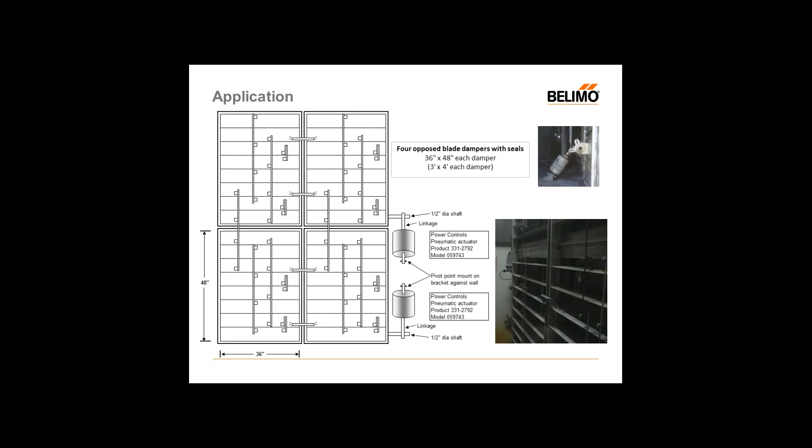Looking at the first application here, it's a typical one we've come across in the past, where we assisted a customer in replacing some older pneumatic type actuators. You can see the photos on the left and right, showing a typical assembly we came across on an air handler, and the information provided to us in terms of the physical aspects of the damper. But of course, there are other conditions that apply when you properly size the damper actuator.

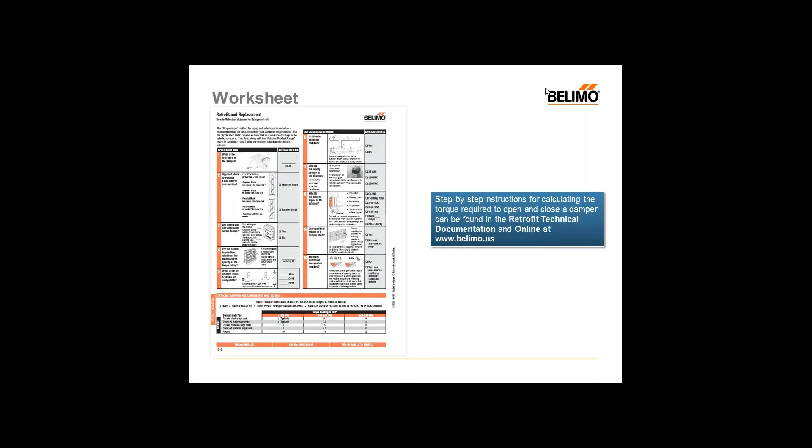The worksheet shown here has basically 10 simple steps that will help you properly size and select a damper actuator. These instructions can be found on our retrofit technical documentation and also online at our Belimo website. We always have technical support staff on hand to help with additional questions you may not be able to answer through this worksheet. But like I said, these cover the fundamentals in sizing.

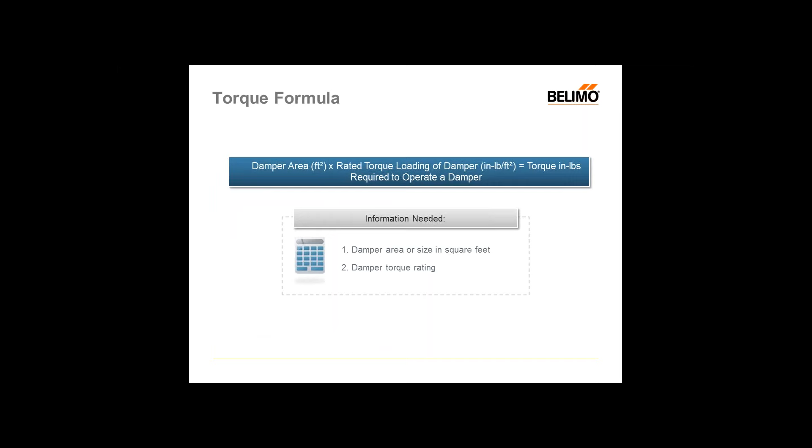Now let's start with the basics: the torque formula. We start with the damper area in square feet times the rated torque loading of that damper, which would be in inch-pounds per square foot. You multiply these two to get the torque in inch-pounds required to operate the damper. So the two pieces we need are damper area and the damper torque rating.

So first step, what's the total area? In that first example we showed, we had the height and the width. Either if it's already known, or you just take out your trusty tape measure and measure the size of the damper or dampers. You determine that square footage either from inches and converting it into feet, or straight from feet into square footage. In this case, a 3 by 4 foot damper equates to a 12 square foot area.

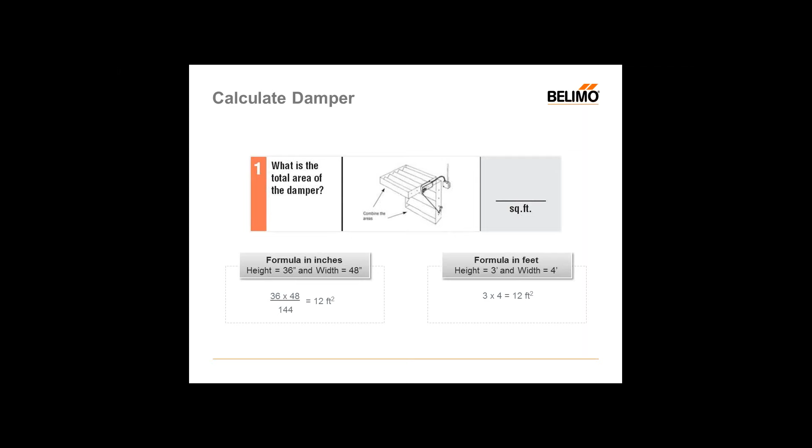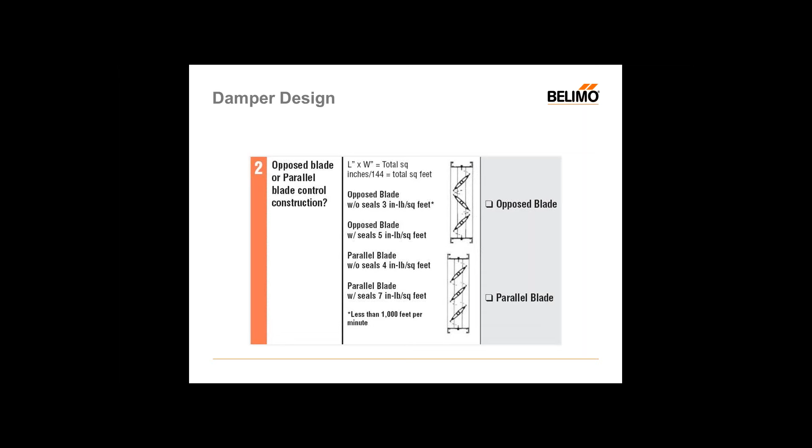Now, damper design - that's very important. So step 2, we have to consider what you're looking at: either an opposed blade or a parallel blade. This also plays a key factor in how much torque is needed to operate the damper. In our case, we have an opposed blade damper. Comparing the two, an opposed blade - just like the name calls out - has damper blades moving in opposite directions, which requires less torque compared to a parallel blade type damper, where the blades move in the same direction. These will typically use more torque.

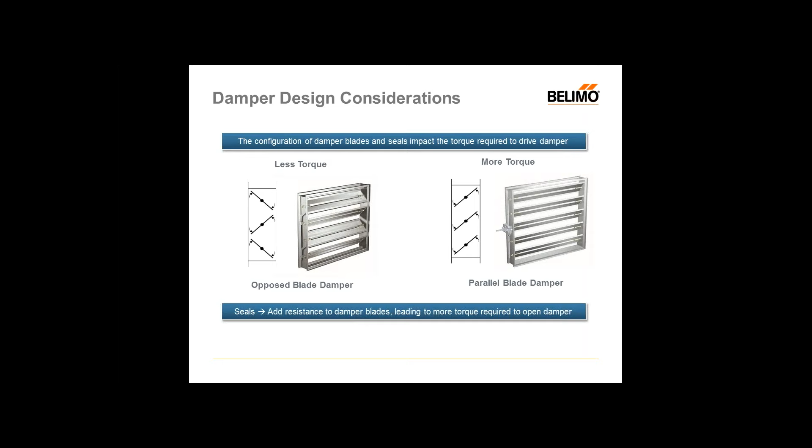Now, not only does the blade design play a factor, but also seals. You could have edge seals on the damper blades and around the damper frame against the blades, which cause extra friction, leading to more torque being required.

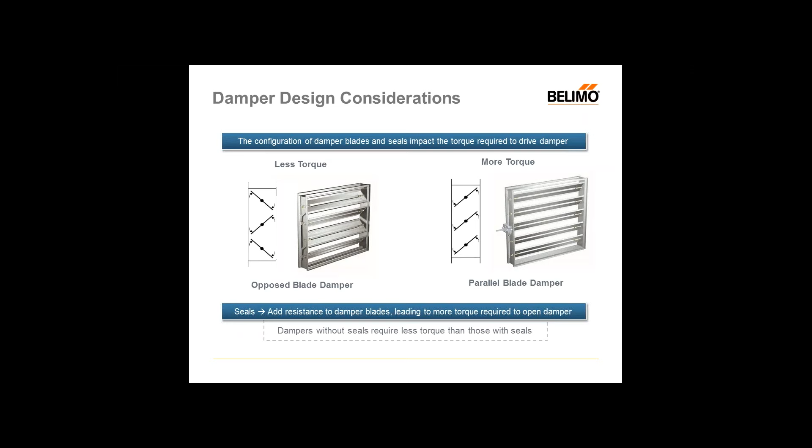Now, going from steps 1 to 2, we know what the damper design is, basically the blade type being used, in this case opposed blade, and we also know it has seals on them. So the torque loading with seals is 5 inch-pounds per square foot, versus an opposed blade without seals which is 3 inch-pounds per square foot. So there's that difference right there.

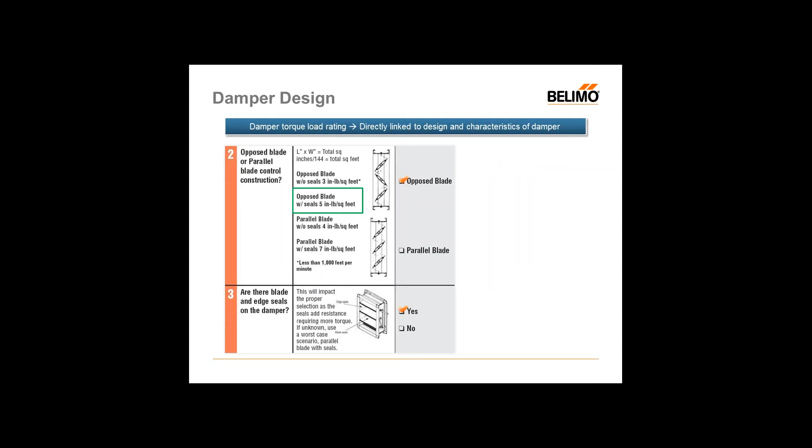Step number 4, the damper manufacturer typically would provide this information. It could either be on a cut sheet, a label stuck onto the damper, or on a blade or damper frame on the side, but sometimes this information may not be available. Maybe that label's scratched off, worn out, or the information just can't be read off the model of what that damper is.

So if it's not available, you can use the square footage information, and using that along with the type of blade and edge seals, in this case that we have, we use torque loading numbers that we've had for many years, worked on in association with a lot of our damper manufacturer customers, which become the typical numbers that you come across in the field.

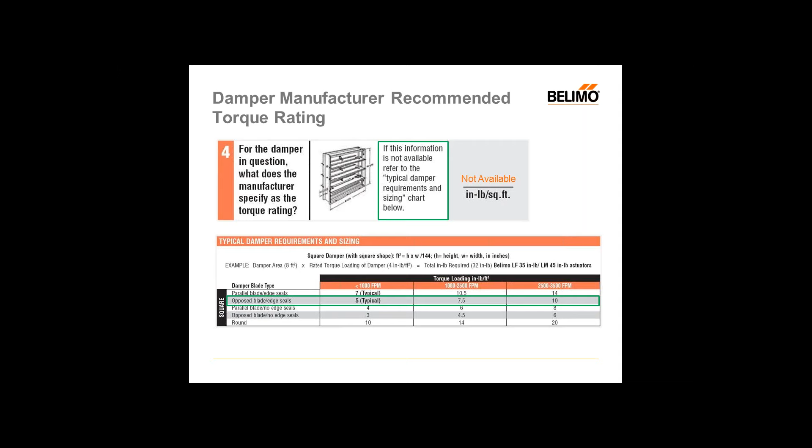In a typical HVAC application, you run into about less than 1,000 FPM in terms of air velocity. Torque loading will increase as well if that air velocity increases, so that's another factor to take into account. In this case, we'll start off with 5 inch-pounds per square foot at 1,000 FPM typical air velocity.

Now, if you do not have the FPMs, and if you do know the CFMs, you can easily calculate that by just dividing that by the square footage to get the FPMs.

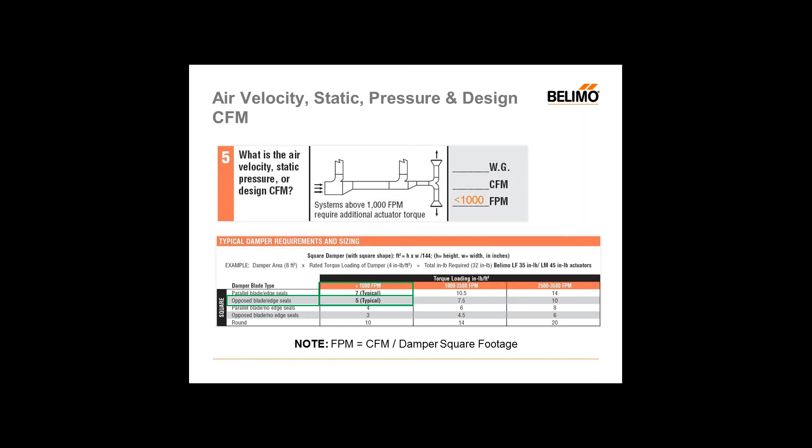Now, we do have these 3 different values for less than 1,000, 1,000 to 2,500, and 2,500 to 3,500 FPM. If the application does have a higher air velocity, we recommend that you work with the damper manufacturer to get more information on how that damper would be affected by higher velocity. That additional information will help us assist you in determining what the best solution could be.

Now, going through steps 1 through 5, we've determined the square footage, which is 12, the type of damper blades, and whether it has edge seals or not, which determines the torque loading, and of course the air velocity. So taking that typical less than 1,000 FPM gives you about 5 inch-pounds per square foot.

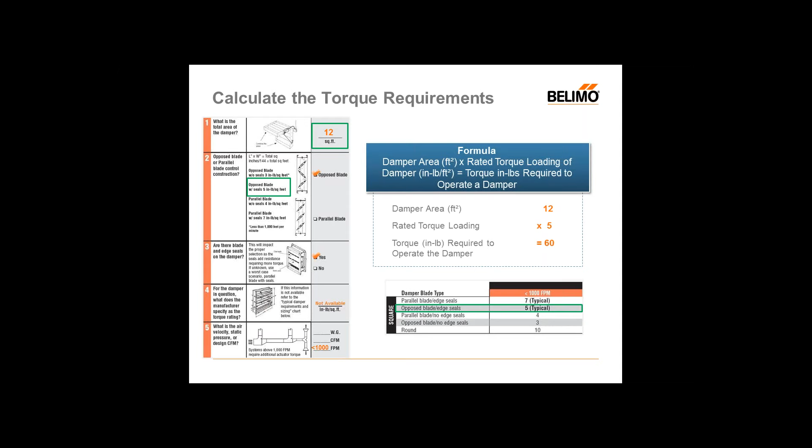So 12 times 5 gives you a torque of 60 inch-pounds required to operate that damper in this configuration under these conditions. Now let's say we take the same size damper but the blade construction is different, so instead of opposed blade, it's now parallel blade. Square footage is the same, but torque loading will change because of the configuration. Instead of 5, now it's 7 inch-pounds per square foot, so 12 by 7 gives you 84 inch-pounds required to operate that damper.

Now let's go one step further. Let's take the same square footage, go back to opposed blade, but now the FPM is higher. Square footage is the same, but because of the higher FPM, the torque loading goes up. Say 2,500 to 3,500 FPM gives you about 10 inch-pounds per square foot. That results in a torque of 120 inch-pounds, so now it's a lot higher than where we started.

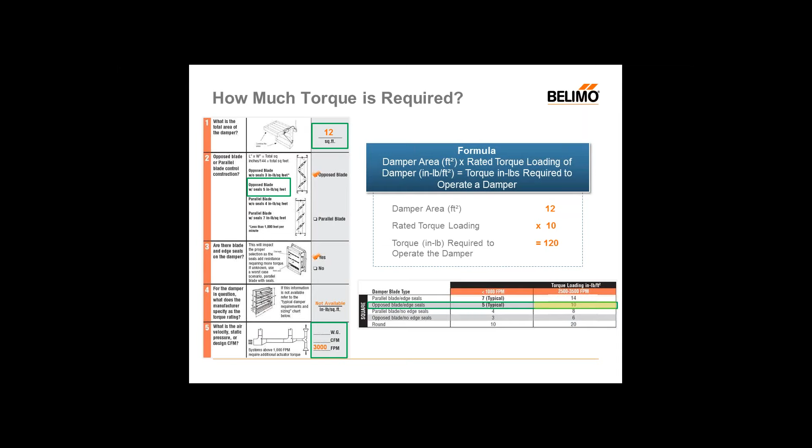Now, knowing this information, we move on to actuator selection. So now we've narrowed it down, what do we need? If you're familiar with Belimo's actuator offering, we have a spring return actuator line, starting with the TF series, the smallest at 22 inch-pounds, all the way up to the EF series at 270 inch-pounds. Or a non-spring return line, starting from the LM series at 45 inch-pounds, all the way up to the GM series at 360.

Now, step 6. The question is: is fail-safe actuation required? Looking back at those 2 lines I showed you, will spring return be needed? In this case, it was, as part of an air handler unit, and they needed spring return because of the damper location being used for air intake. Up in the Northeast, conditions get really cold, and you want to prevent any really cold air coming into the system if there was a power failure, to prevent system damage, namely a coil freezing over and bursting. So is fail-safe required in this case? Yes, it is.

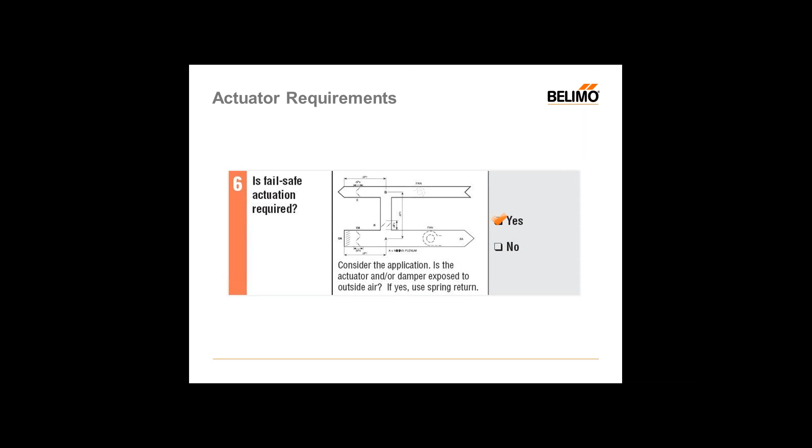Step 7, power supply. This is very important because if you don't have electricity and power to the actuator, it won't move.

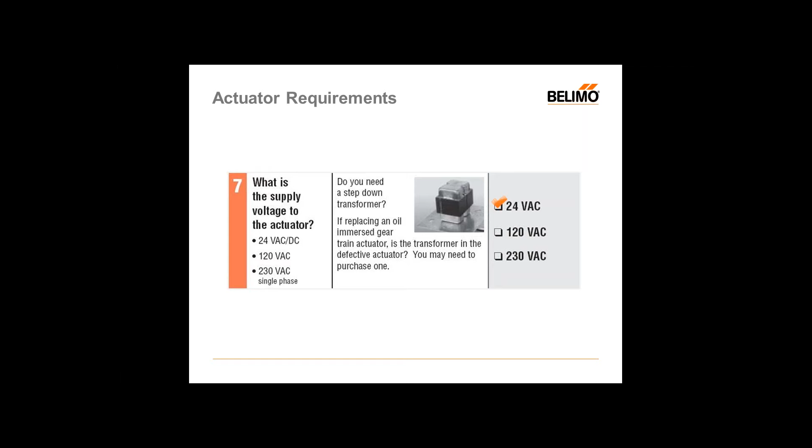So in this case, it's a typical 24 VAC application. We do have line voltage models too. Going through our catalog and website, you'll see different types of actuators and torque ranges. But in this case, 24 volts AC is the typical type of voltage used. If you don't have 24 volts AC readily available, we have a transformer in our accessories offering that can help you get to that voltage.

Step 8, in addition to the power, what kind of control do you need? You have the basic on-off, a 2-wire type control, where you need either close or open. Floating point, which is a lower end type of modulating control, where you go either clockwise or counterclockwise or stay in place.

2 to 10 or 0 to 10 VDC control signal is a modulating type control, directly proportional to a control signal. 4 to 20 milliamps is similar, but in this case it's current. We also have pulse width modulation, a time-based type control, or another type of control that could be configured through our MFT, our multifunction technology offering, which can be configured in the factory or in the field depending on your application.

Most cases, controllers are typically 2 to 10 or 0 to 10, but if you have something out of the ordinary, like a sequencing type application, we can tailor that control range through our MFT offering. In this case, the customer only needed a 2 to 10 control input.

One note for the 4 to 20 milliamp: our Belimo actuators don't have a 4 to 20 milliamp input direct, only 2 to 10. So what you would need is a ZG-R01 kit, which is a 500 ohm resistor placed in shunt from the input down to ground, which will convert a 4 to 20 milliamp signal to 2 to 10.

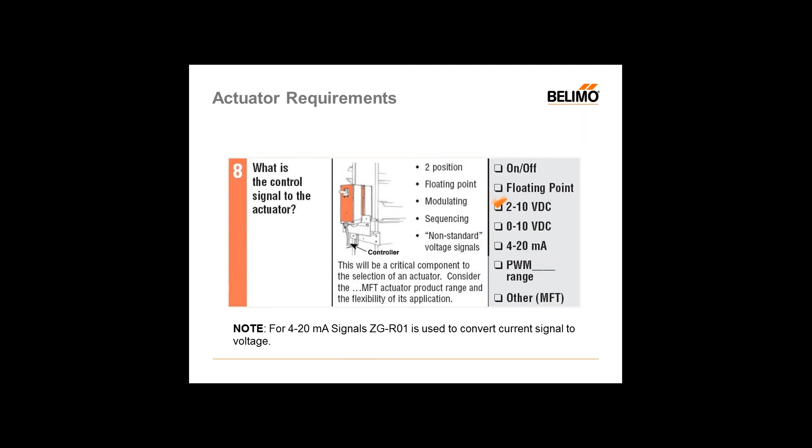Now, based on information we've collected, knowing that we need fail-safe, a 2 to 10 control input, 24 volts AC, and the torque calculated from the damper being at 120 inch-pounds, what actually fits that criteria would be an AFB 24-SR.

The rated minimum torque is 180 inch-pounds, and it has a 2 to 10 control input. Now keep in mind, the SR does not mean spring return. It's a Swiss German term that actually means modulating, not necessarily spring return. It's all part of the nomenclature, which is another webinar we can have and discuss further.

The AFB 24-SR is 180 inch-pounds minimum, guaranteed through the life of the actuator, so that's what the torque output of the actuator will be. There's your temperature rating in terms of ambient operating, and also your control input. The SRs typically also have a feedback of 2 to 10 as well, in case there's some monitoring to do, depending on your application, which can be fed back into the controller.

Number 9, the second to last requirement is: can this actuator be direct coupled? Depending on the installation, it could be an existing older installation where some actuators are foot mounted with linkages, or if it has a control shaft, either as a jack shaft or on the side of the damper frame, most of these actuators can be direct coupled.

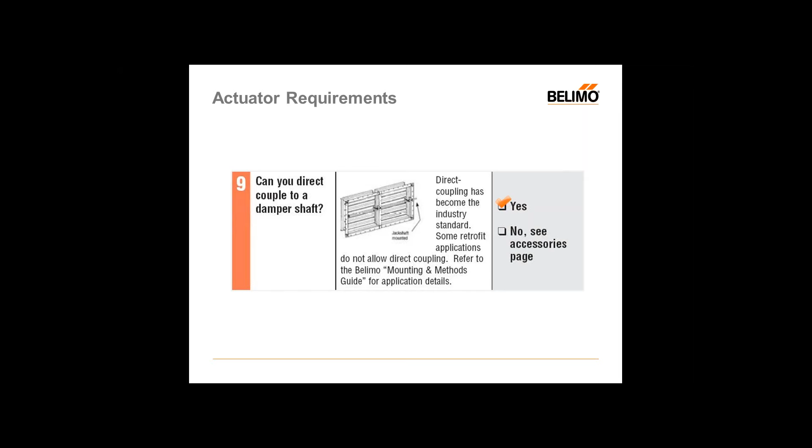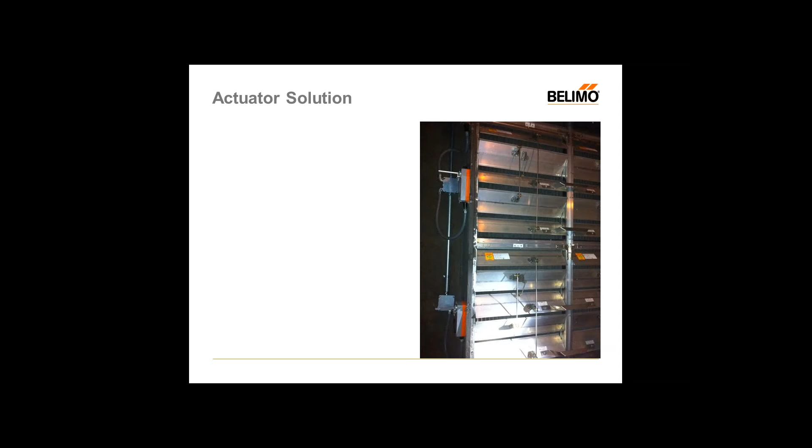Now, if you have other cases where you don't have access to the control shaft of the damper on the sides or through a jack shaft, it could be depending on how the damper was installed or if there's additional sheet metal around it. We do have different kits besides the mounting brackets and the indirect mounting kits that we have.

We also have this jack shaft solution, which allows you to connect an actuator directly to a jack shaft while removing the jack shaft bearings. The open-ended design of this jack shaft linkage allows you to clamp onto a jack shaft diameter from 1/2 inch all the way up to 1.05 inches. That open-ended design allows you to mount an actuator up to an EF in size, up to 270 inch-pounds. So there's one solution that allows you to mount an actuator directly to a jack shaft if you can't do it from the sides.

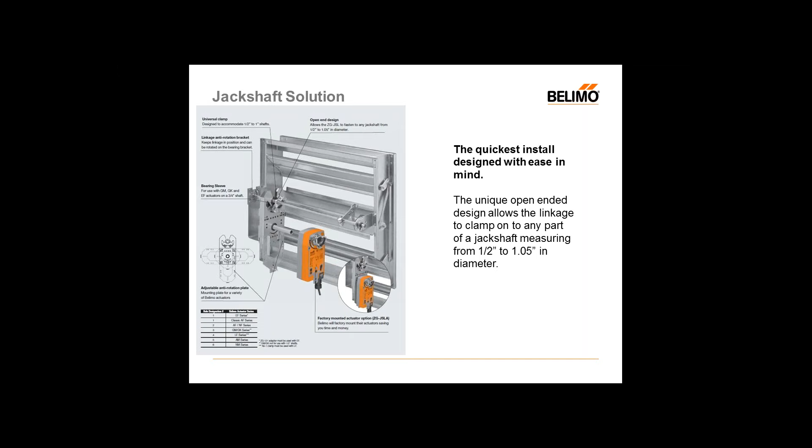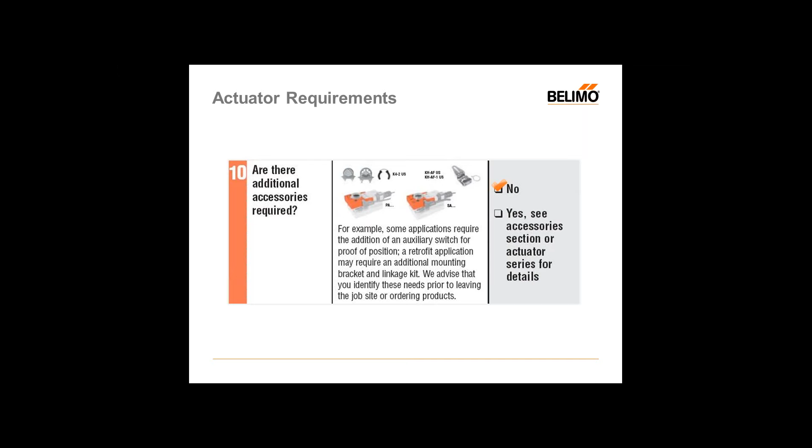Last but not least, like I mentioned before, accessories. Besides the mechanical aspect of things in terms of connecting the actuator to the damper, we have electronic accessories as well. Some models you can attach add-on switches, potentiometers. We do also have other mechanical type accessories that allow you to attach to dampers, such as shaft extensions and different types of clamping devices. So in this case, since we can direct mount them, we do not need any additional accessories, and no additional electronic accessories either, like switches or anything else.

Now, in terms of the type of installation or where it's being located, the actuators could come as standard NEMA 2, which is basically for indoor use, or NEMA 4. We highly recommend you look deeply into your application and see what is required of our actuators. So depending on the location, say it is exposed to the outdoor environment, NEMA 4 housing or some kind of weather shield is highly recommended.

Now, NEMA 4 is not offered on every single actuator, but you'll have to consult our catalog, and we also recommend contacting Belimo for further information on what kind of models and what features are offered.

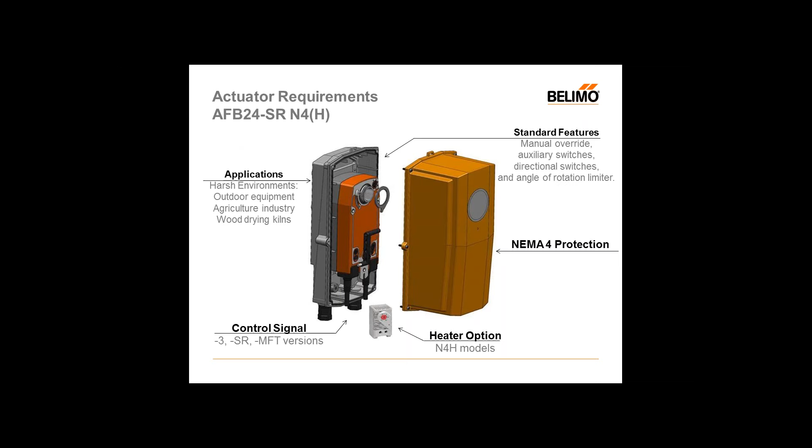And besides that worksheet, we also have a great online and offline tool, which is our Select Pro. Our Select Pro software is downloadable and can also be run online through the website. It allows you to do exactly what we just did today, to properly size and select the damper actuator, and also go through our water side product as well.

And we also have a retrofit section, which is very handy to do cross-referencing to competitor products, and to properly size and look at different features and the differences between our actuator solution versus the competition.

And Belimo University is another great tool we offer, which could also provide additional training to your staff, and we can offer it online and offline.